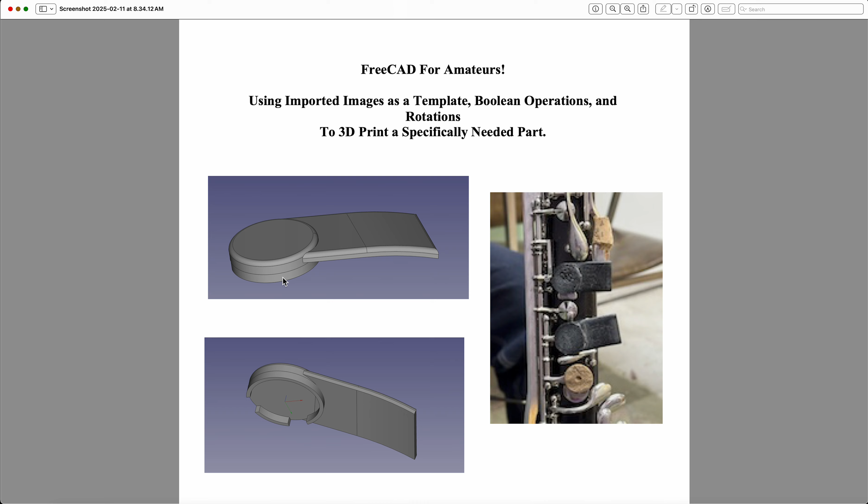Issues such as rotation. So you can see what we're going to do here, and here's two views of what we're going to build. Essentially, there's going to be at least five different bodies. There's going to be a basic pad that fits over the key with two cutouts, a second pad on top to which the extension itself is attached. We're going to leave these two unattached so we can rotate this as we need. Okay, well, let's go ahead and get started.

So here I am in the part design workbench, FreeCAD, up, plane flying overhead. Let it get past. Okay, and so what we're going to do first is...

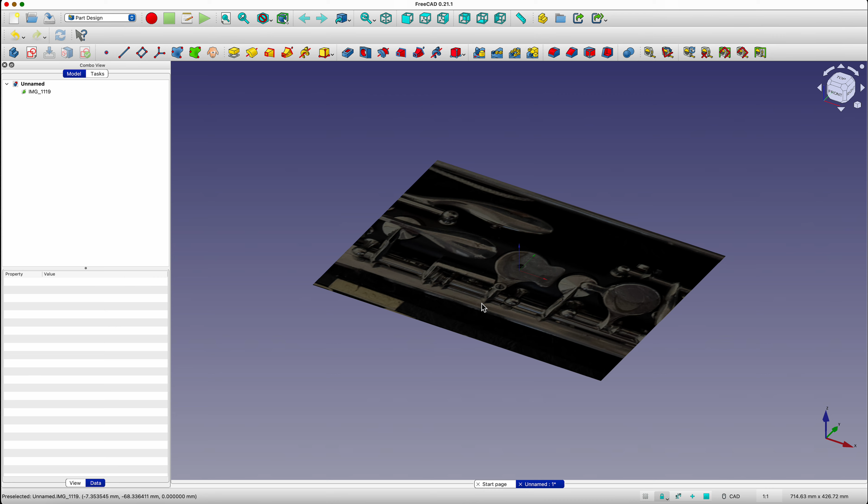We're going to import the picture of the top part of the clarinet that we will use as our template. So we go here to import, and here's my picture here. This is actually the picture that we're going to import. And it's a picture of the clarinet without the attachments on. So let's go ahead and get a top view, looking now straight down on the image.

The first thing we're going to want to do here is resize this image to the measurements that we have taken. So I measured the diameter of this pad here to be 17 millimeters. So how to resize this image to 17 millimeters?

Well, we go over to the image, right-click, change image, and you can see in the change image dialog box there's a button that says calibrate, and make sure, of course, that we have keep aspect ratio checked. So now let's press the calibrate button.

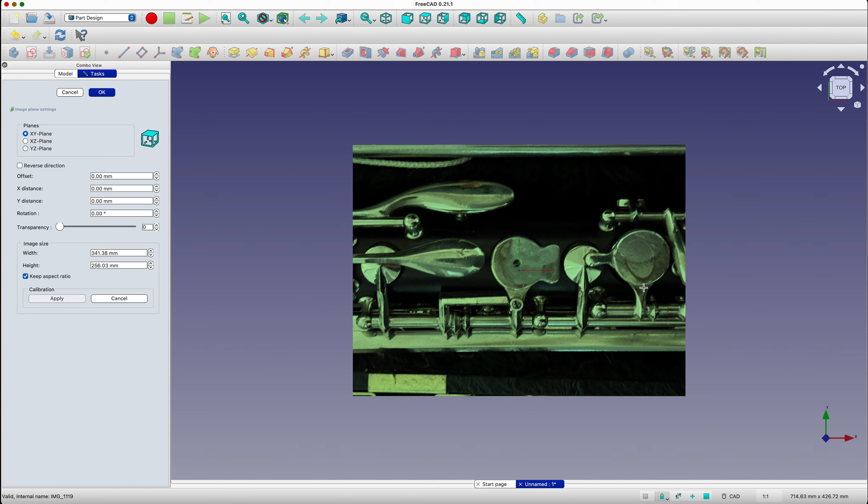What the calibrate button then allows us to do is select two points in a line and then resize it to those points. So let's go over here, and we know from measurement that this is 17 millimeters. So let's go ahead and click once and try to find the maximum dimensions it's going to be. Double click on that, because I think that's... well, no, maybe not. We can cancel, calibrate again. Let's see here. Yeah, that looks about right.

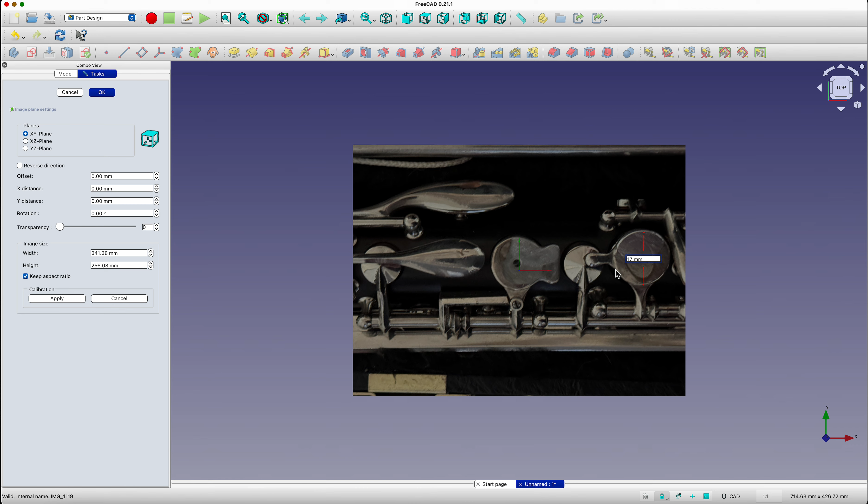Okay, and because it's 17 millimeters, you'll see it's highlighted. Type in 17 millimeters, and we will see over here this all change once I hit apply. Okay, so now this image is scaled in such a way as to let this be 17 millimeters.

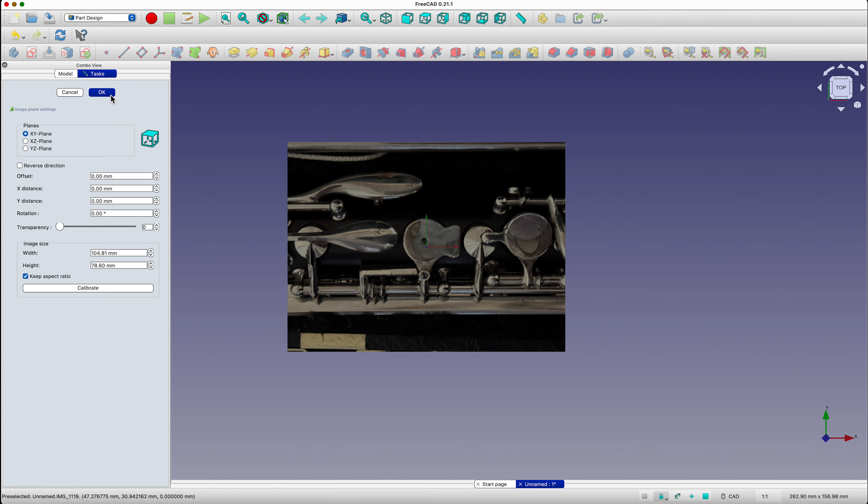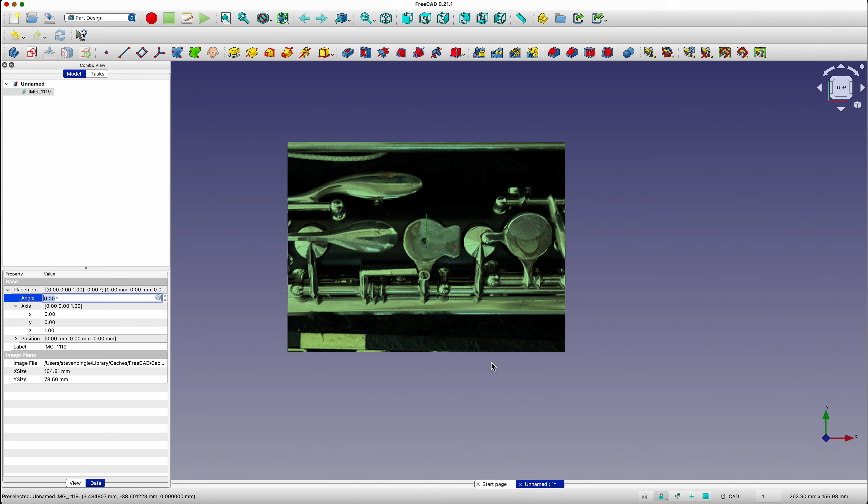So now let's go ahead and rotate the image and center it on the pad we want to make. So let's click OK. Let's click on the image, go over to placement, go over to axis. We want to rotate this around the Z axis, which it's already marked. So let's go ahead and rotate it to the right 90 degrees.

Well, there we go. It was minus 90. 90 would have done it the other way, but okay, we're at minus 90 degrees. Now let's go ahead and center this pad on our XYZ axis.

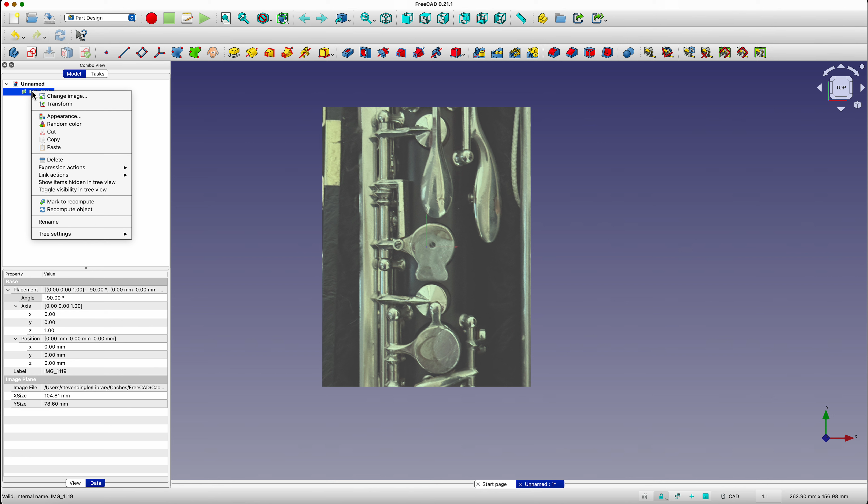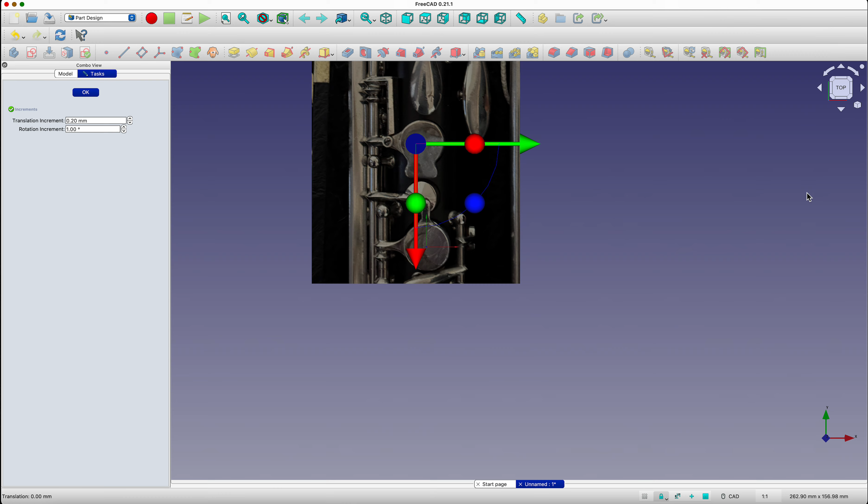We can do this a couple of ways by just altering some of the position numbers here, but another way to do it is simply to go over to image, right-click, transform, and then move it physically. So we can kind of just slowly get to where we need it to be, about, by hand. There's no rocket science here because there's going to be inherent measurement errors anyway. Okay, and that looks to be pretty much centered, maybe a little on the high side.

But how we're going to figure this out now is, remember that I said that this pad was in fact 17 millimeters. So at this point now, let's go ahead and make the first pad, which is going to attach here. So let's go back to our model, and let's go ahead and create a body.

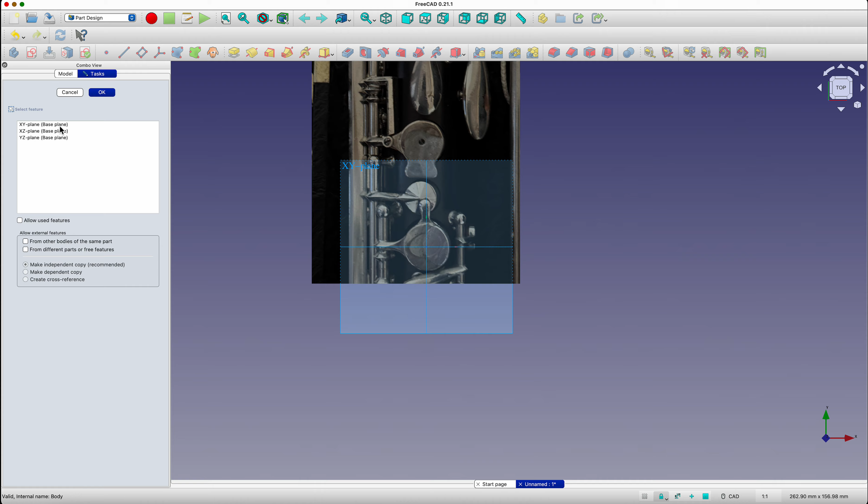And let's go ahead and rename this body to be base pad. Okay, create a sketch. And the sketch is going to be looking straight down on the top, so it's the XY plane. And now let's go ahead and create the first pad.

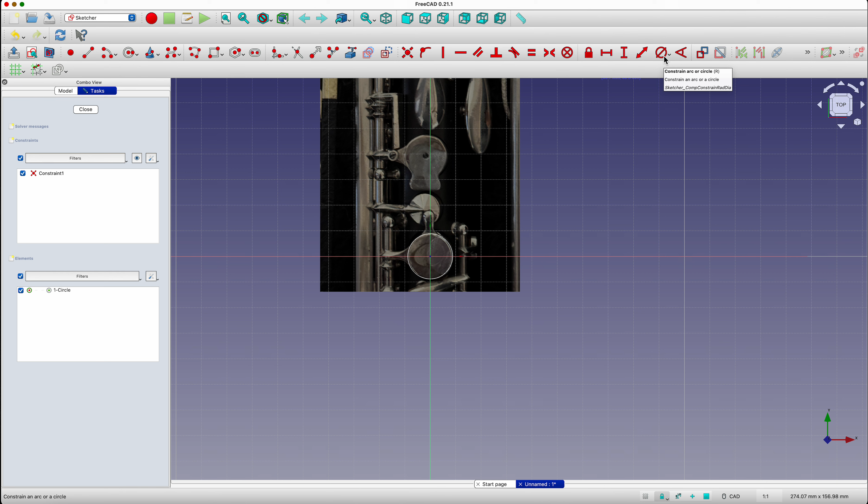And we're simply going to make a circle here. So we're going to make a centered circle, which is why we moved the image to be in the center. Index to be coincident on the intersection point. Bring out, click, and then constrain it to be 17 millimeters.

So it looks as if we didn't quite get the image exactly correct. But because we're going to 3D print these, there's inherent errors. Trust your original measurements, and remember, we are using this image only to create a reference point for how we want it to sit.

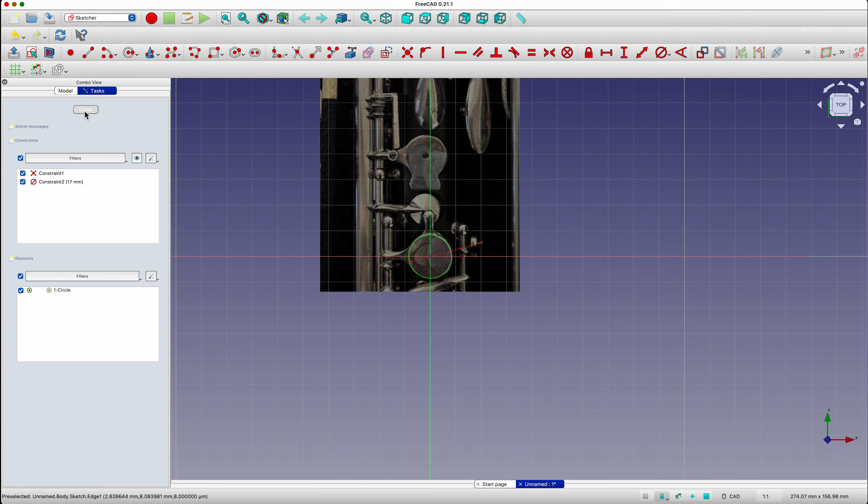Okay, so I'm going to leave it at 17 millimeters, and we've got a constrained sketch. We're going to close the constrained sketch, and we're going to click on the sketch, pad it, and let's make the pad 2 millimeters. It can be 3, but essentially I want the pad to actually sit down over the cup. It'll cup the key. So let's make it 2 millimeters.

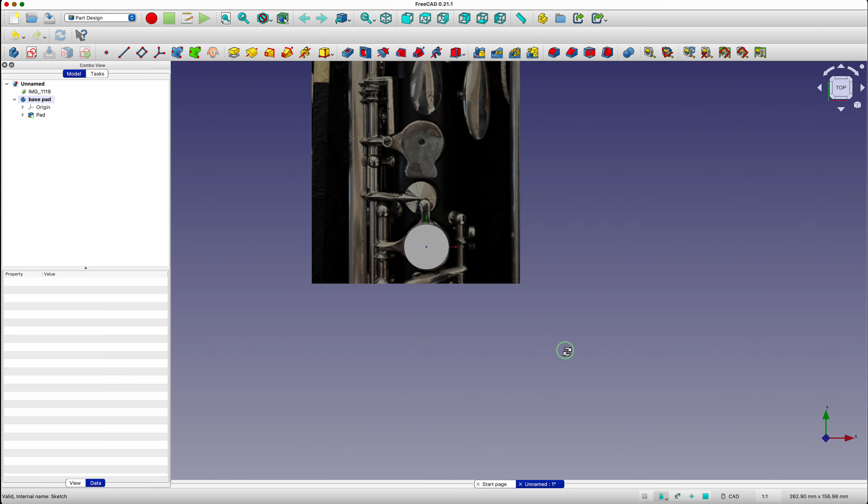You'll see what I'm talking about in a second here. Go ahead and rotate it so we can see. Actually, I changed my mind, let's make it 3 millimeters. No, I changed my mind again, 2 millimeters. Okay.

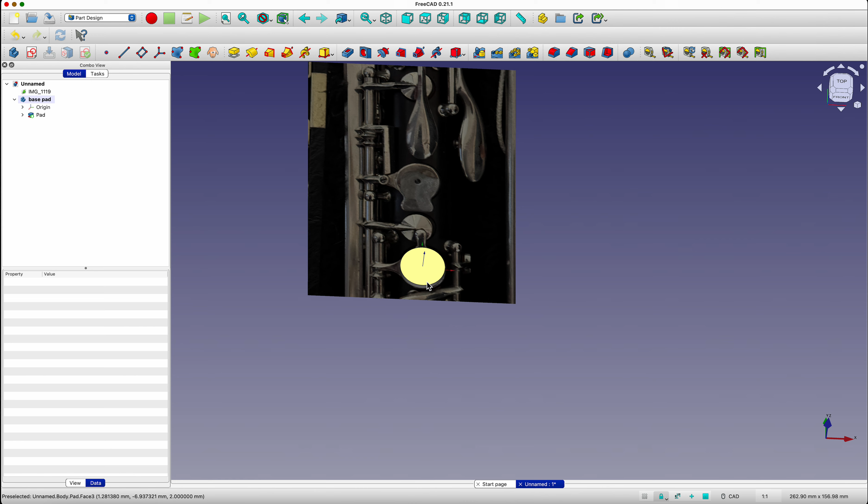So now we want this first pad to sit below, so it has a tight seal. So we're going to then go to the back side of the pad.

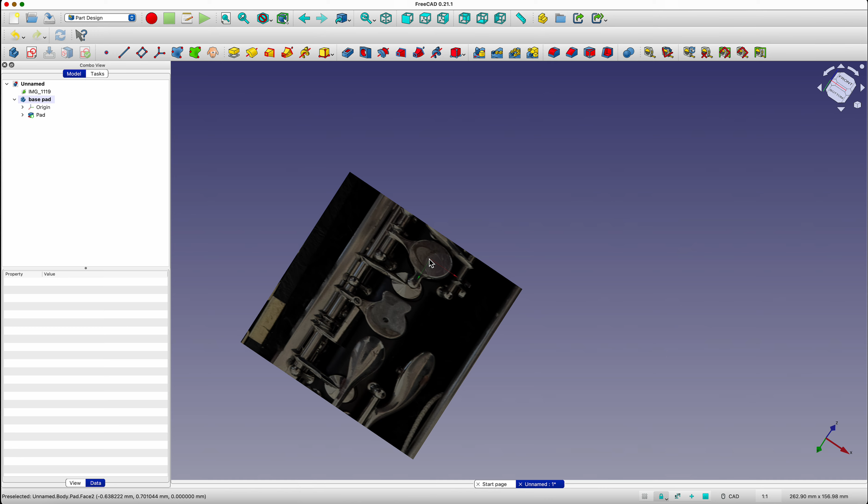Let's make the image go away for a second. Space bar. Click the underside of the pad, and we are going to now do a thickness on the inside of the pad for 1 millimeter. Now, doing this should actually encompass the key, and this will be on the outside of the key, because remember, we are doing our thickness outward. So this is 18 millimeters in diameter. The inside is 17 millimeters in diameter.

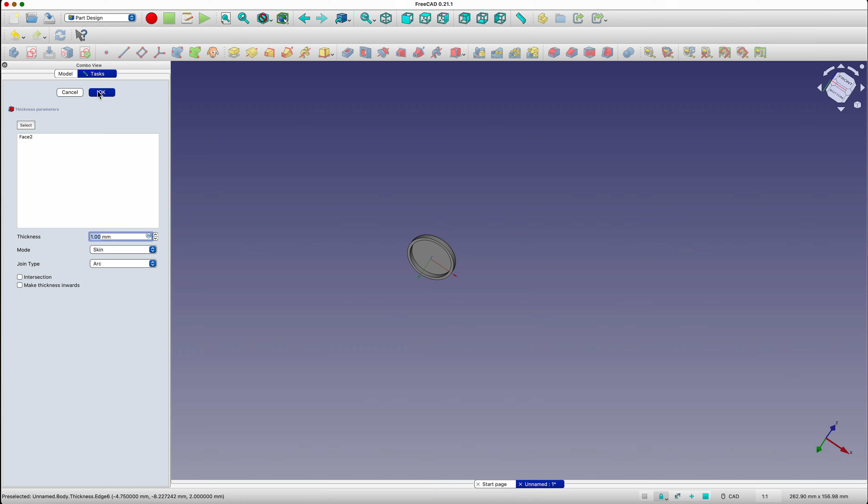Okay, let's go back to the model, bring back our picture. And the next thing we want to do is we want to create cutouts. So when this pad recesses or sits down over the keypad, there will be room for it to sit flush on the top.

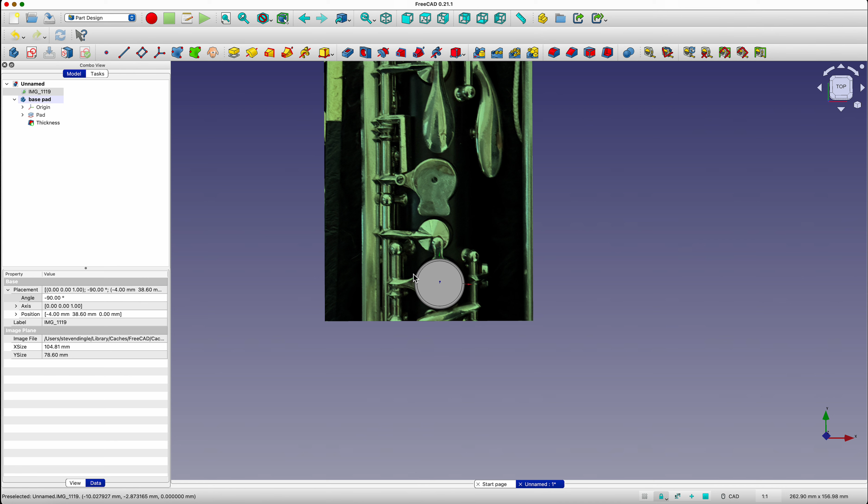So we're going to cut a relief here, and we're going to cut a relief there. The easiest way to cut these reliefs is to actually use a Boolean operation, in fact cutting out squares. So doing it this way, let's go ahead and create a new part, and we'll call this part cutout 1.

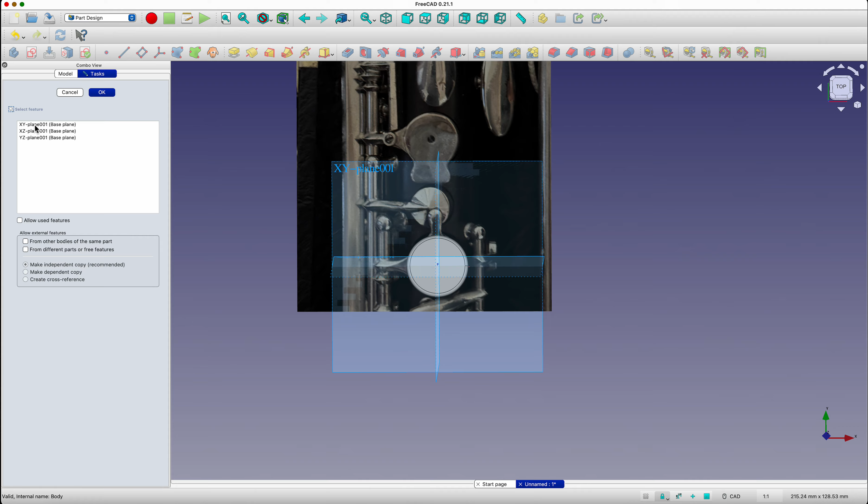Create a sketch, once again in the XY plane. And let's create now, but we want to view section so we can actually see what we're doing. By taking off the view section, we can just look and see where we are. We're going to now create a cutout, essentially by drawing a square.

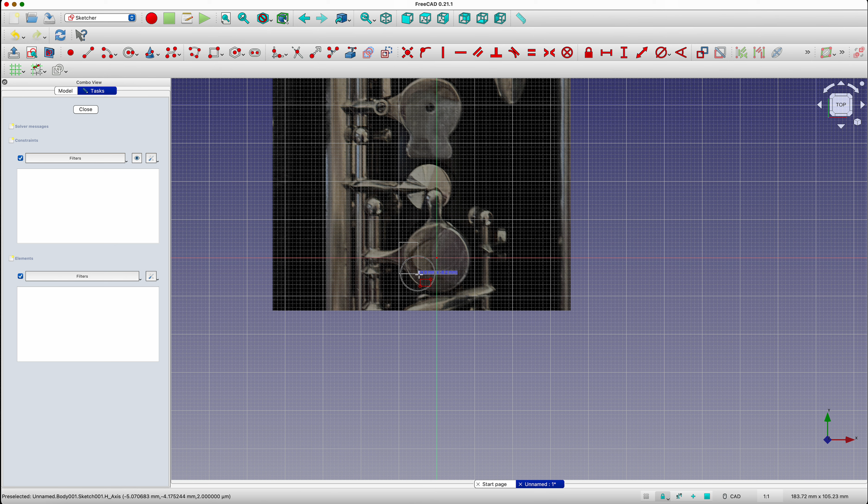So you can see what I've done here is I've created a cutout. We can go ahead, and just to be complete, we should of course constrain this in height and width. And it looks like that should work. Well, maybe not.

Here, let's see what distance we are from the X. So I click those two. Let's move it up a little bit, 4. Yeah, that looks like it'll work. But I better make this maybe a little bigger. Well, actually, let me show you some other way to do this here.

Let's take away that one constraint and let's make it symmetrical. So to do that, we can click this, we can click this point, we can click the center line and create a symmetrical constraint. Okay? So let's make this a little bit bigger, maybe 9 millimeters. And that should cover the cutout.

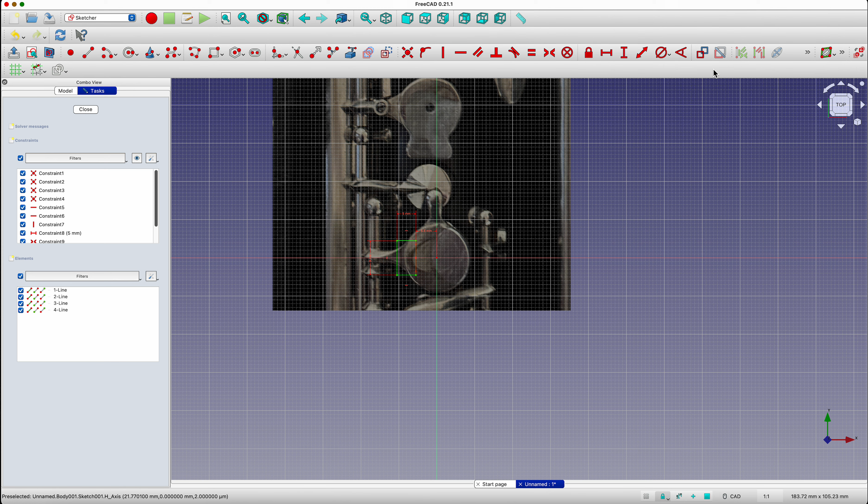Okay, we still don't have a completely constrained sketch. And what's not? It's that way. Okay, so now let's just go ahead and click this point, the distance from that, 5.5, and now we have a fully constrained sketch. Okay, close this out.

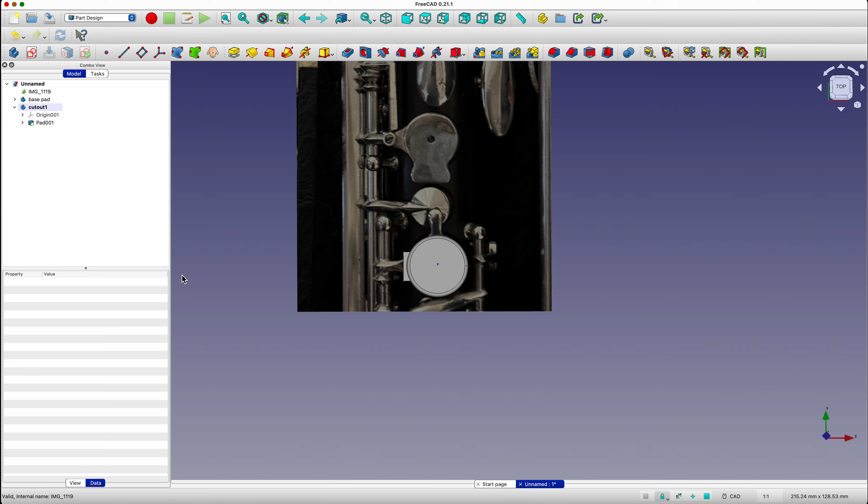And we can pad the sketch. Now remember that the lip for this cup is 1 millimeter. So all we really need to do is to pad that lip 1 millimeter. And if we just pad it as 1 millimeter, let's go ahead and remove the image by hitting the space bar. We can see where we're at.

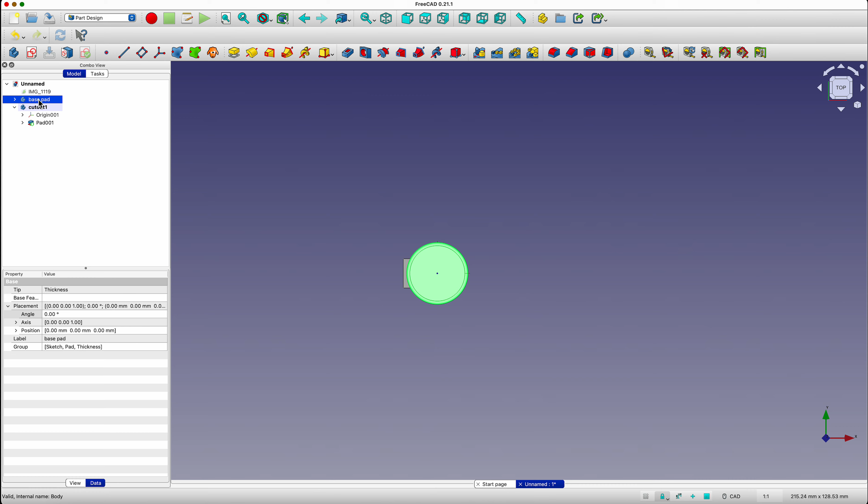So now we want to go ahead and remove this cutout. Well, now how do we remove the cutout? This is where the Boolean operation comes in. Let's make the base pad the active body by double clicking it. Now it's the active body. Remember, we always have to work with active bodies. It's in bold, so it's the active body.

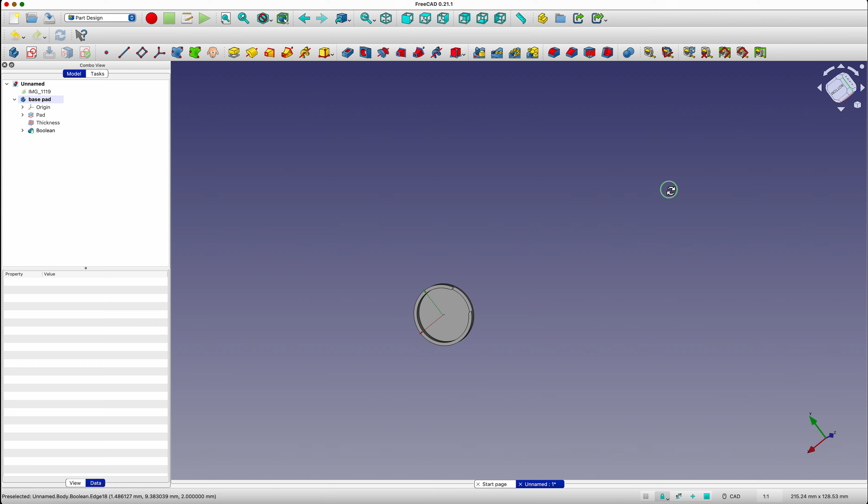Let's select cutout, go to Boolean. We see that the cutout is selected. We cut it, we click OK. Now we have a Boolean where we have - oops, come on, Steve. See, we've now cut it out. Okay, so let's call it, and that's Boolean 1. Let's go ahead and bring the image back.

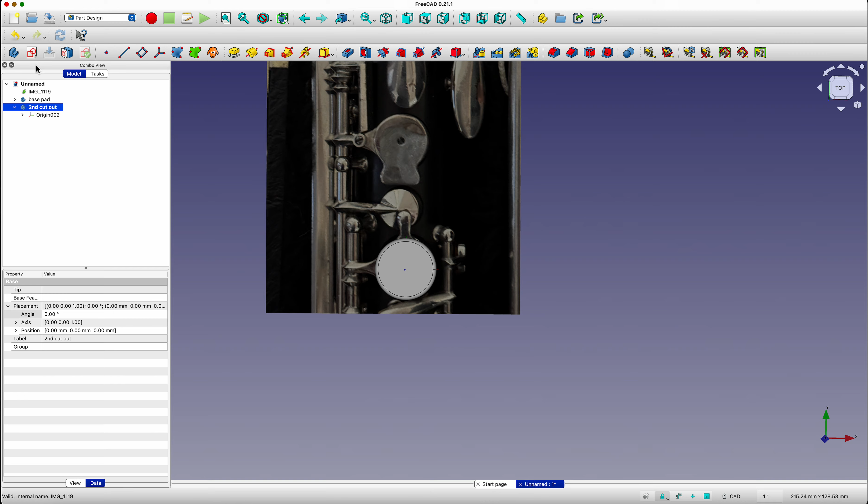Now let's create the second part, which is going to be that cutout. So create another body, rename it second body, second cutout. Let's create a sketch in the second cutout, once again in the XY plane. Let's hit view section so we can see what we're doing. And we're going to go ahead and now create the second cutout the same way.

Create a rectangle. And it's not quite centered, but it'll be close enough.

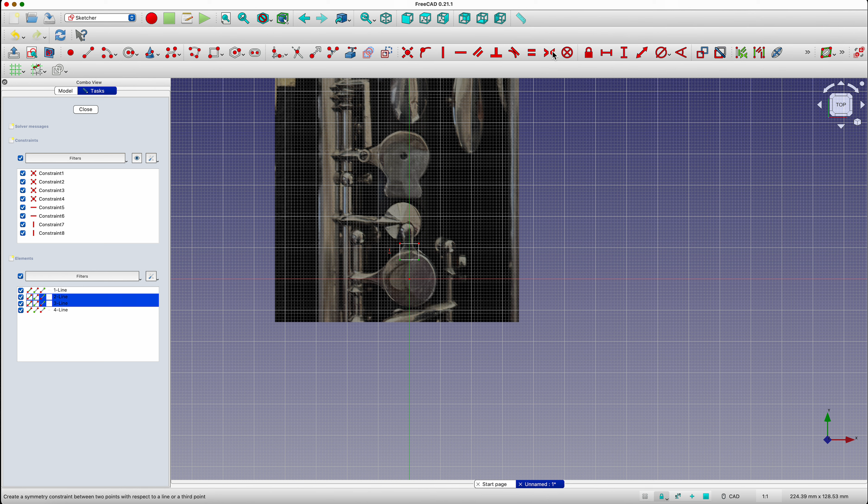Let's go ahead and make this symmetrical for now. Click one point, click the other point, click the center line, make it symmetrical. We're just talking about now making it, getting a sketch that is fully constrained. Go ahead and make that 6 millimeters.

Make that distance to be, I don't know, 5.5 millimeters. Make the depth 6 millimeters. And I've got to now remember where our constraints are, where we are not constrained. There we go, where are we not constrained?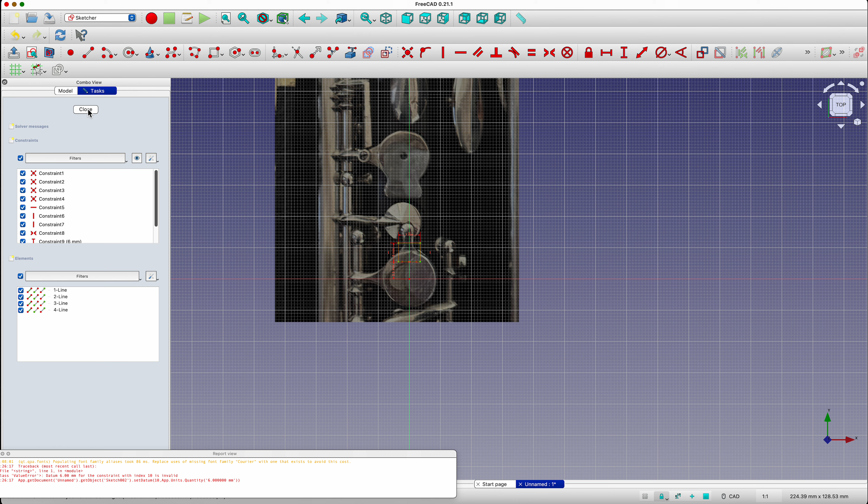We're not constrained in the length. Okay, here we go, length. Let's make it 6 millimeters. And it looks like we're covering the cutout pretty darn well, so we can close the sketch.

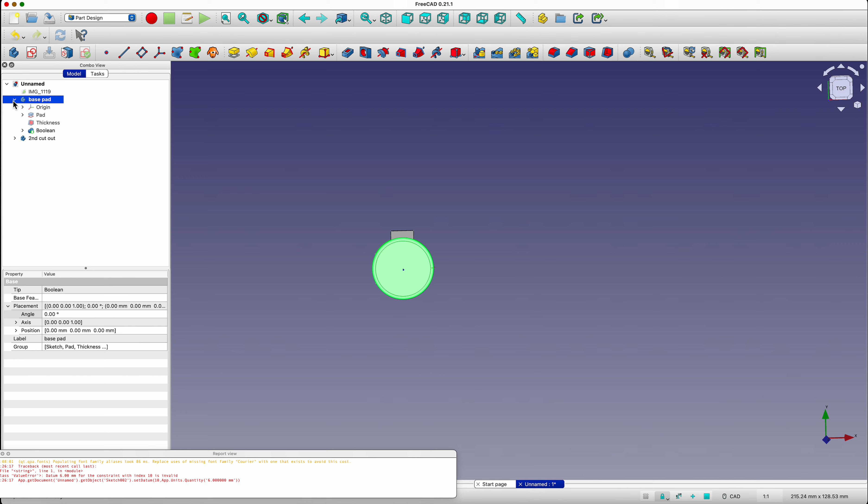Take out the image, select the sketch, pad the sketch again to 1 millimeter, and now we can see where that is. We do the same thing with the Boolean: make sure the base pad is selected as the active body, select the second cutout, go to Boolean operations, cut it. Now we can see that we have the cutouts.

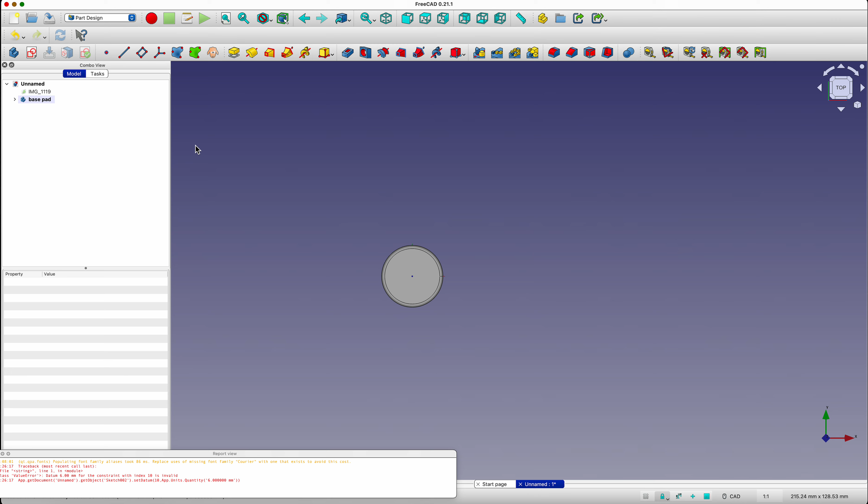So let's go back to the top. Let's bring the picture back. Now we can ask ourselves, what does it look like? Let's look at it from the bottom. It's kind of hard, a little bit harder to see here.

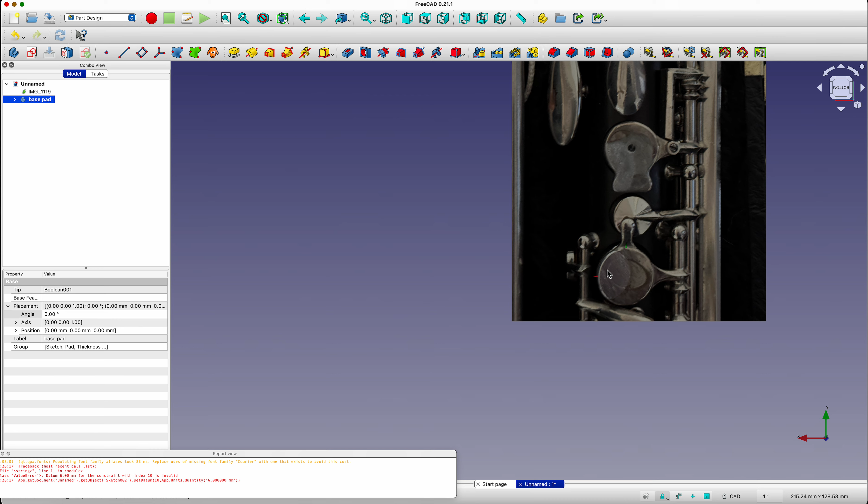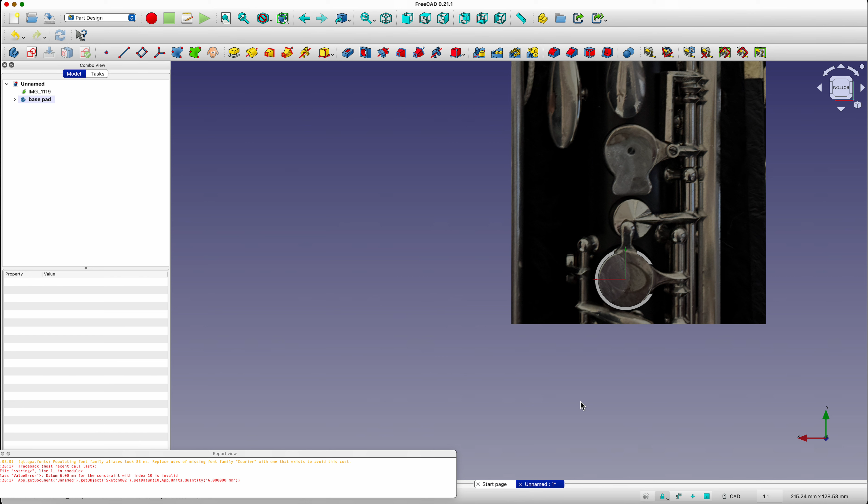Let's see, trying to see if there's a way you can actually see what it looks like. By holding down, you can kind of see the outline. The other thing we can do is increase the transparency of this. Oh, there you go. So we can now see how the outline is, and these line up just fine.

All right, let's go back to the top view. So now we have the base pad, which will fit on the key with the cutouts. Now we're going to attach a pad on the top. Why are we doing a second pad? Because it's the second pad that's going to hold the finger extension, not the base pad.

And that's because we want to be able to rotate the finger extension in a 360-degree circle, and you'll see what I mean in a second. So let's go ahead and create a new body and call this the top pad.

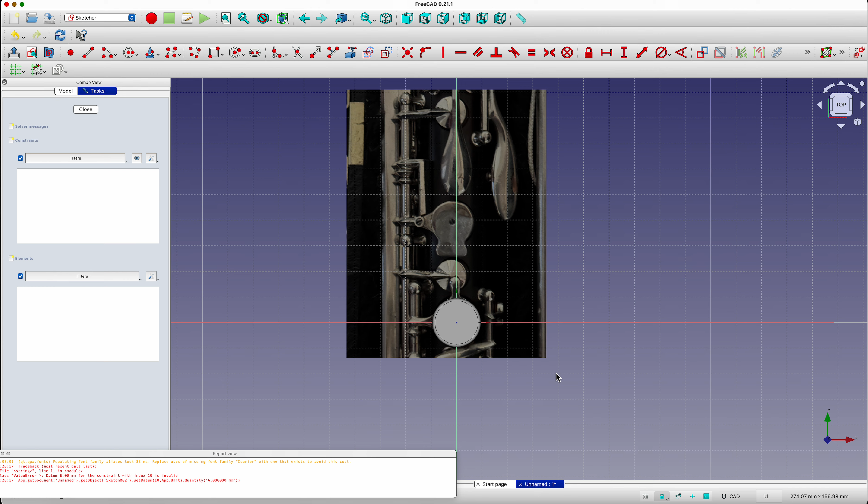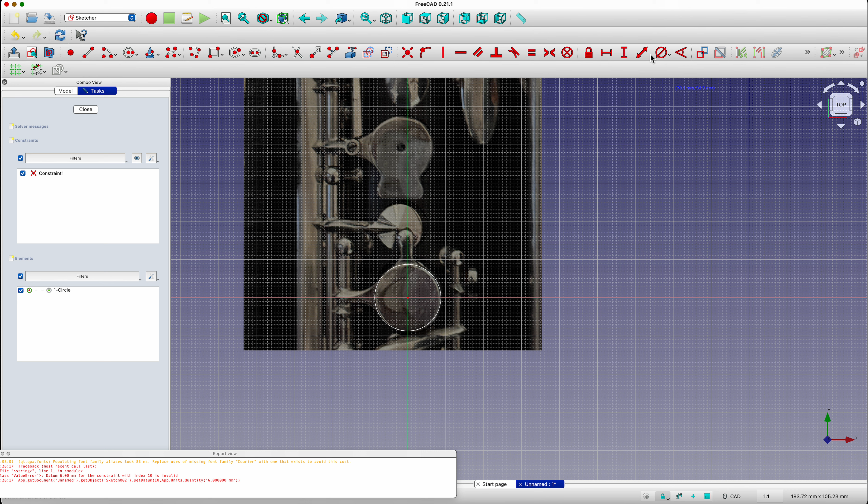Let's go ahead now, create a sketch, XY plane, and we know that this is 17 on the inside and 18, because remember we did the thickness outwards. So we should be able to draw a circle, find the concentric point, start the circle. But let's go ahead and view the section so we can see what we're doing. Constrain this to be now 18 millimeters.

Close this. Pad the sketch. And let's pad the sketch 3 millimeters.

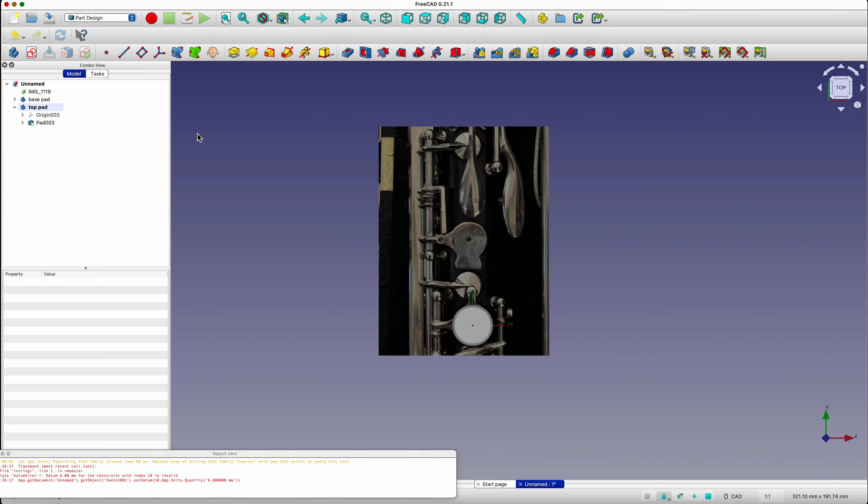But now, as we all know, the top pad is embedded because we built everything from the ground floor. Now, we didn't have to do it that way. We could have selected the top as the frame of reference.

And actually, let's go ahead... I didn't do it that way because I would have built the sketch. If I had simply clicked the plane of the bottom pad and then built the sketch on that, I would not have a separate body to work with. And that's important from the perspective of being able to rotate it. So that's why I did a separate pad.

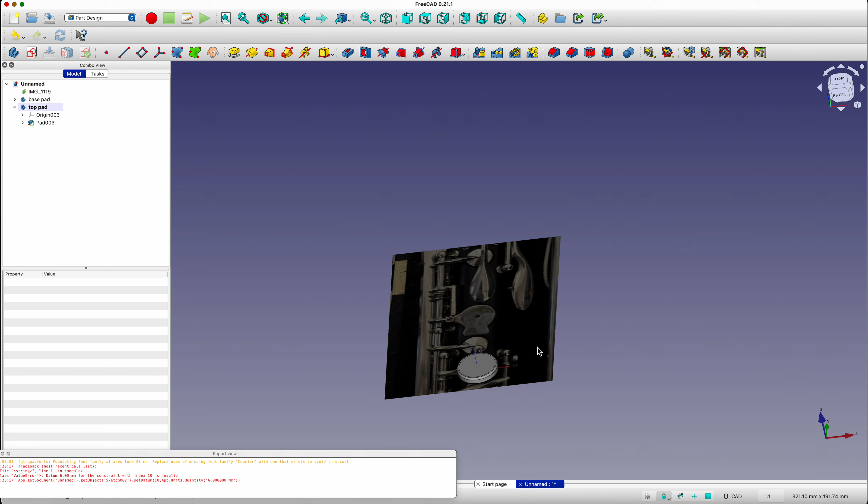But now we have to move the pad in the Z direction to stand proud but attached to the bottom pad. So how do we do that? Well, we can click the top pad. Let's go ahead and do a front view.

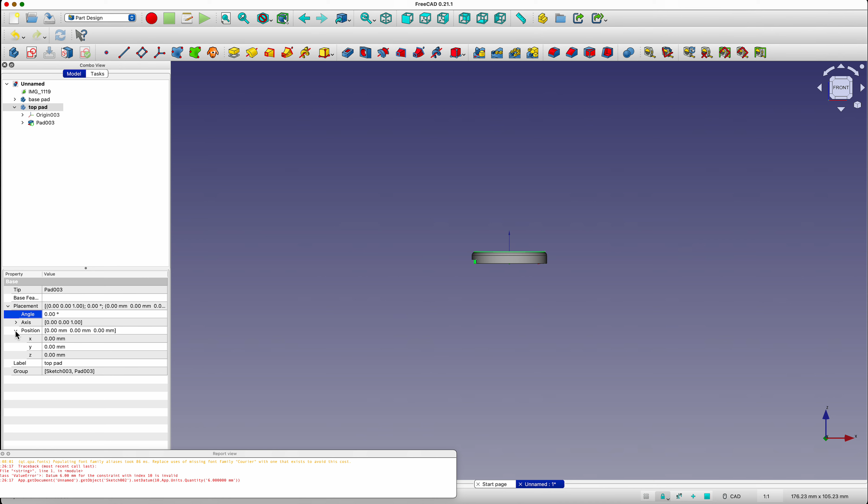You can see what's happening here where the bottom pad is embedded. We can click on the top pad, go to the position tab, and now we can go to the Z and simply start moving it up. So we move it up 2 millimeters.

It looks like I didn't do that right. It looks like the sketch was 17 and not 18. Did I make a mistake there? Oh, that's because I didn't do my math right. It's 2 millimeters on a side, so it's not 18, it's 19. Sorry, folks, bad math.

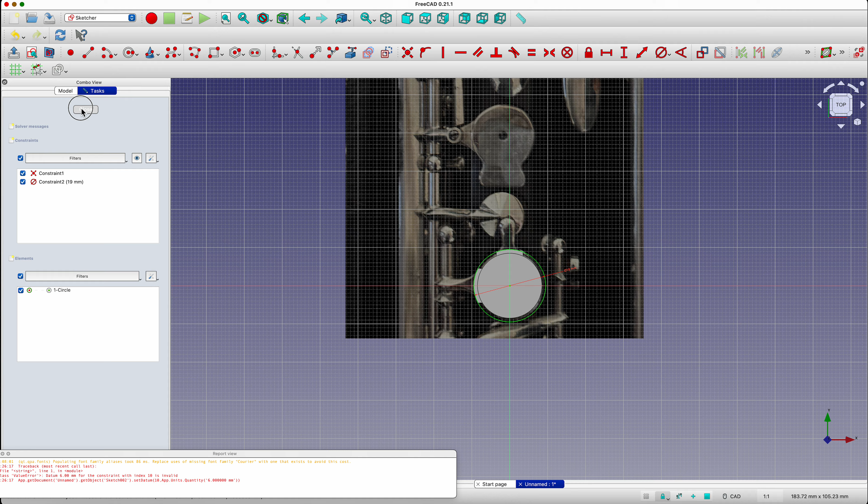There we go, okay, so now we've moved it up, and we can see—let's take the image away—we can see that we now have elevated the pad with 2 bodies.